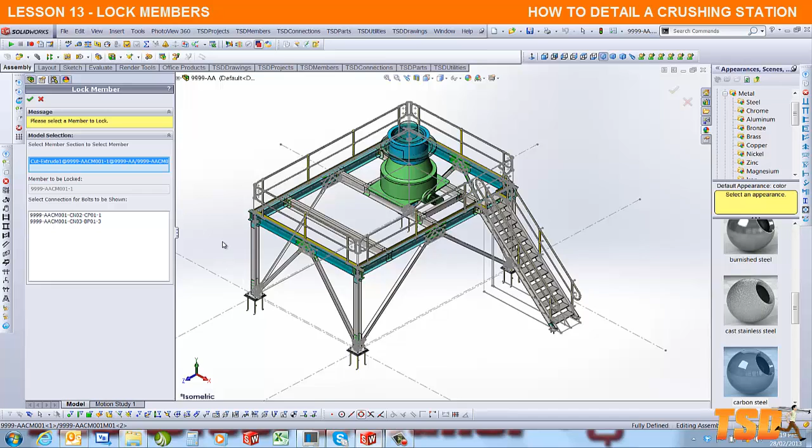So if we go to our TSD members and go lock member, select the column, and we need to select the connections that are going to come with this, with the bolts associated to it. For this instance, if we zoom in, the bolts that come with the column are the base plate bolts, so we're going to select those. There's a code there for BP, for base plate. If we select that, hit the tick, now it'll go through a lockdown process.

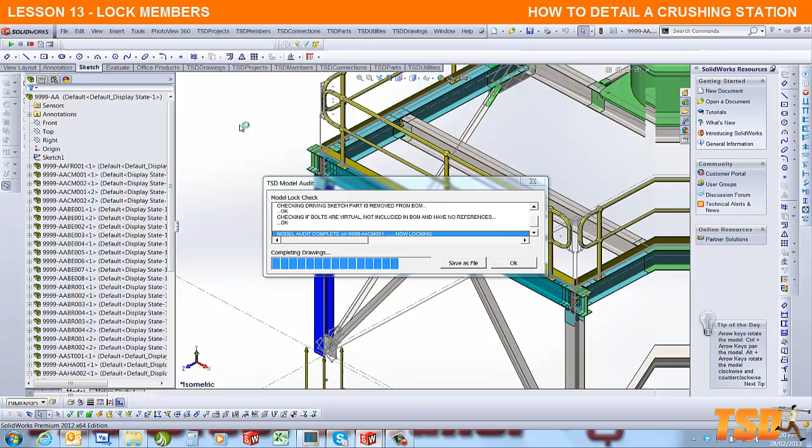What that's doing is swapping out sections, comparing plates with what's already in the library. It's filling in a bill of materials automatically based on the numbers of items in the model, and updating the drawings associated to that. Now you can see that column's done.

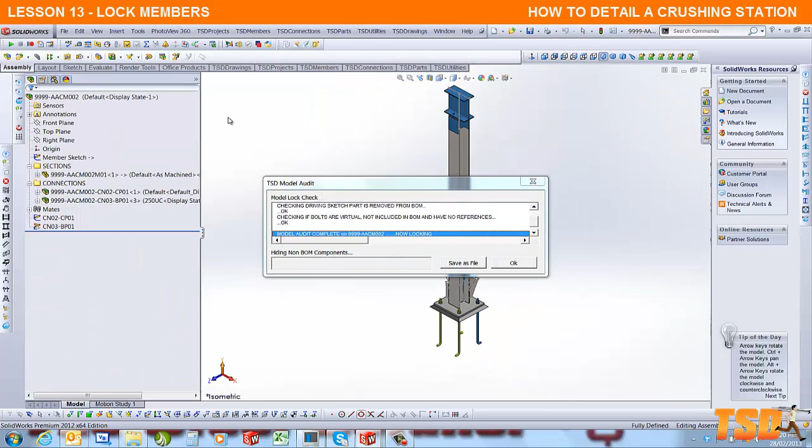Also, we're going to do the opposite column, so we just go around from one member to the next. Members, lock member, select the column, select the base plate, hit your tick. Now before you do that, make sure you do a Control Q and a Control Save.

So that'll be comparing plates, swapping out plates, swapping out the template, updating the bill of materials and the quantities associated to that, and finalising the drawings for us. So that column is now done. Control Q, Control S.

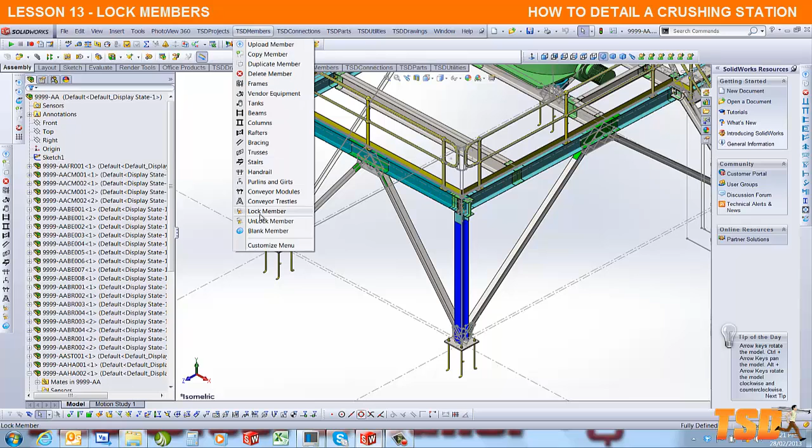Okay, let's select the beam up the top. So members, lock member, click the beam. Now this beam has two sets of bolts to which it's going to be sitting on top of the columns. They're the only bolts that come with that beam, and they are cap plates. If you look at these two descriptions here, CP2 and 2, and they highlight as you can see, and then we click the tick and that will lock that beam for us.

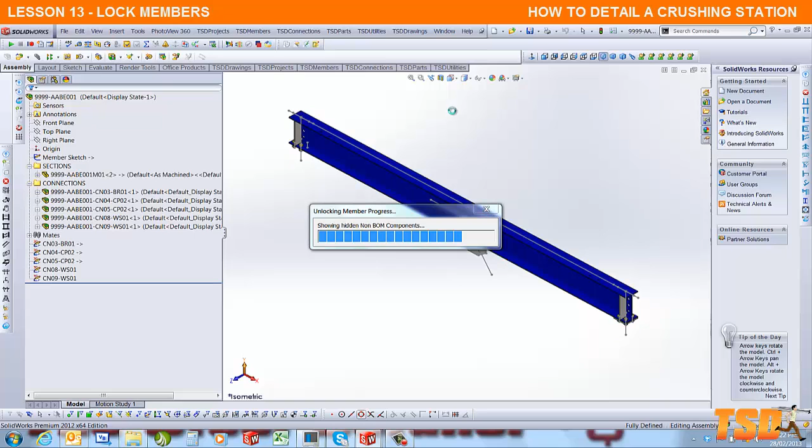Okay, now I'm just going to unlock that beam. Unlock the member, which you can do. Once you've locked, you can also unlock, which is a beautiful feature of TSD. And it's one thing that I did notice that had popped up in that member.

If I go into it, just going to remove all appearances at the top. This plate here should be excluded from the bill of materials, and it is now excluded from the bill of materials.

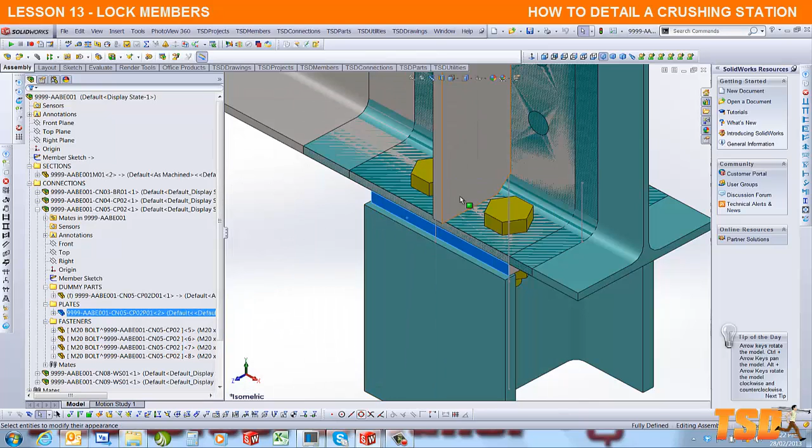And now we can lock that member again. So now we can lock the member, TSD members, lock the member, select the beam. Now the two cap plates that come with that will be locked, so we pick up the bolts and now we go through the lock process.

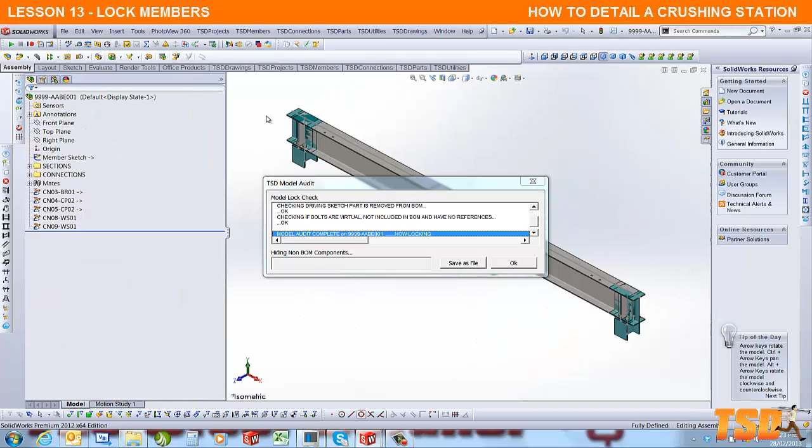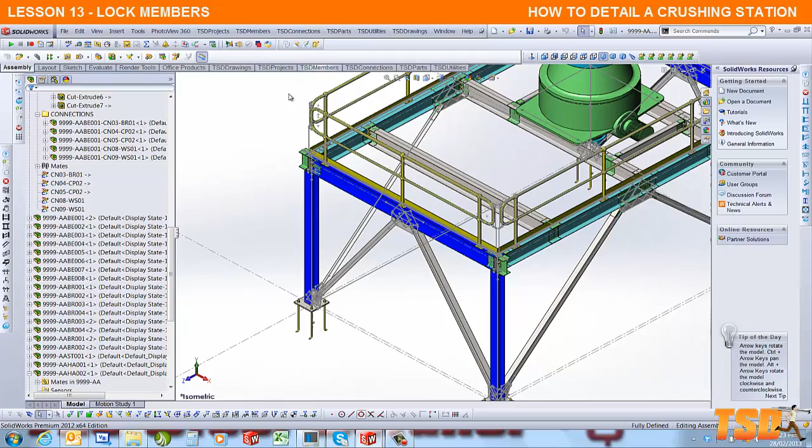So it'll update the drawings, update the plates. Okay, so now that beam's done. What you'll also notice, if I zoom out, is that the common columns for second instances and beams have all been done at the same time, which is really handy.

Okay, so now we need to go and do the rest of the beams. A Control Q, Control Save every time we do a lock. Lock member, select the beam at the back. Now this beam's going to have end plate bolts, and it's the only bolts that come with it.

So if we select that end plate and that end plate, because the others are fin plates, and that's a brace, because with braces, the bolts come with the brace, and with the fin plate beams, the bolts come with the fin plate beams because they're bolting into this member. So now we select the tick, and now that will lock that member for us.

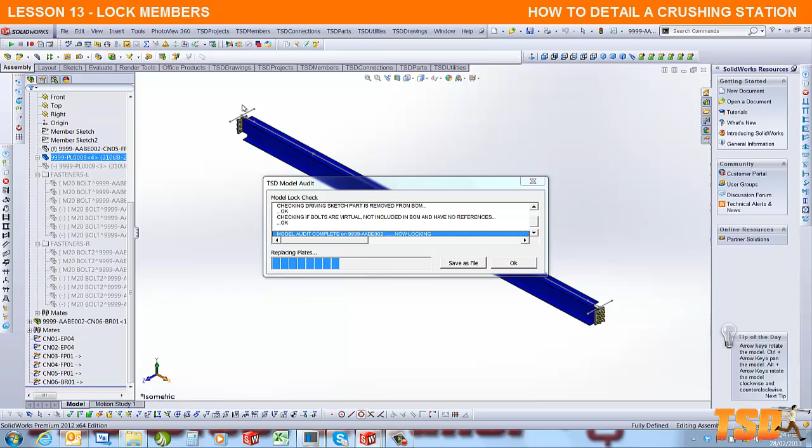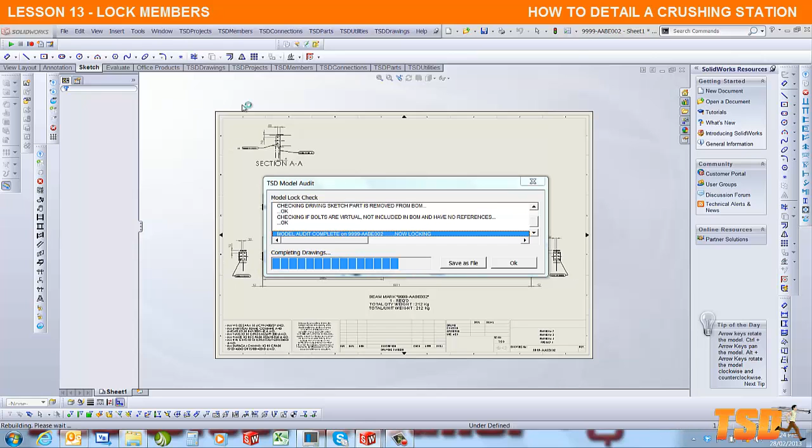So we'll update the bill of materials for the plates and the member section, swap out the bill. That's it.

And now we lock the next member. Now remember that when you do lock, Control Q, Control S, just before you do it. That way the changes that have occurred are actually captured properly.

Now we're selecting the opposite beam, which is going to be that end plate and that end plate, and we're collecting the bolts that come with that beam because it's bolting into the other two beams.

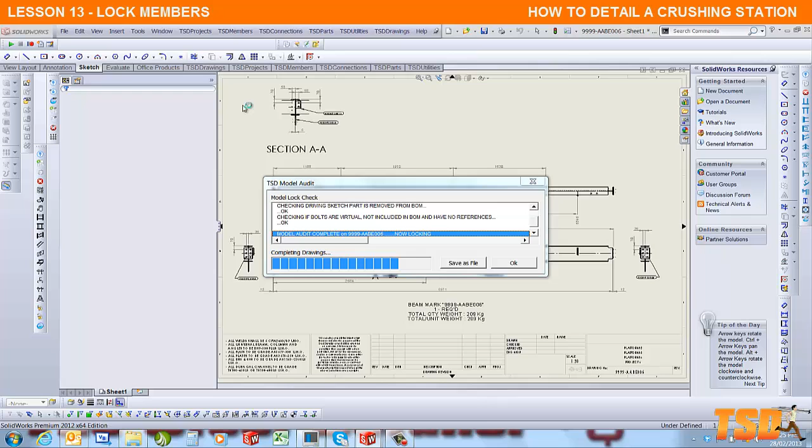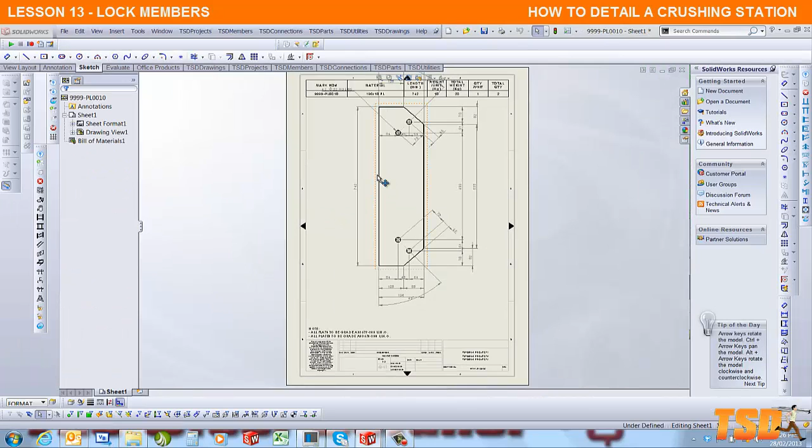So now we're updating the drawings. We'll have to go back to that other drawing and tidy that, and possibly even this one, because that's probably the same drawing. So if we open that up, you'll notice that we've got to do a bit of tidy up work in this drawing because it's changed in some way. Do some tidy up work to finish the drawing off.

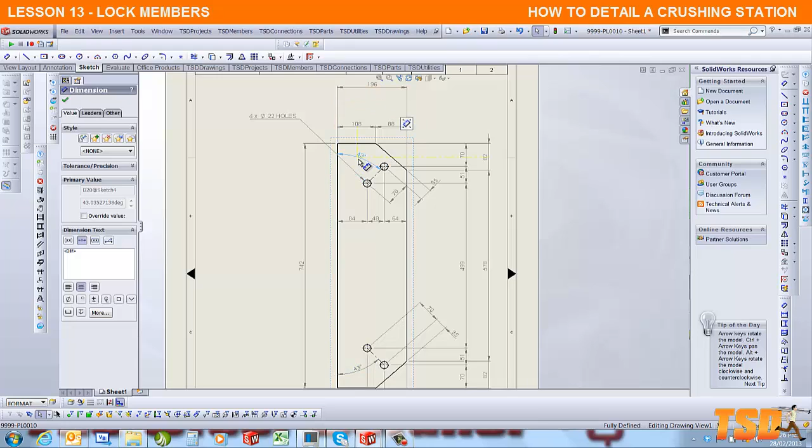Put that in there, bring those dimensions up to there. That pretty much tidies that drawing. You'll notice there's two, so it's also checked to see if there's two, meaning that plate there and that plate there have been replaced.

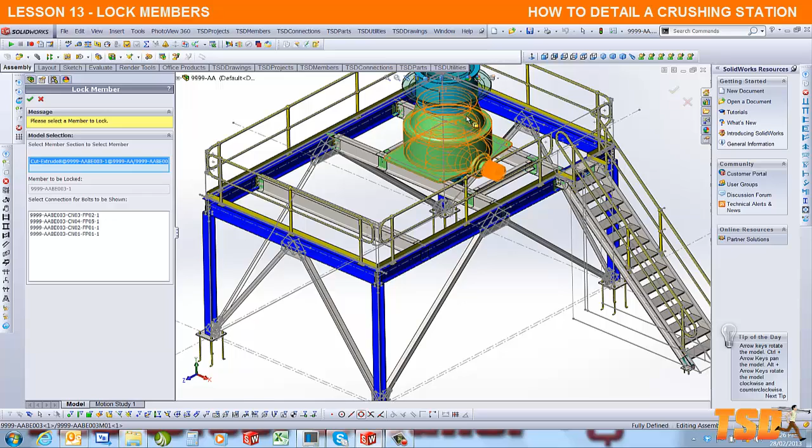Okay, so now we're going to lock the braces. Actually the beams, we'll do the beams first, going through one by one. So this beam has two fin plates at either end. We need to make sure we get the right fin plates. The very first two fin plates are generally the ones that come with the beam, but in this case that's not what's happened. We need to select these two, and as you can see, 1 and 2 are already in the order. So if we hit the tick, that'll lock that beam for us.

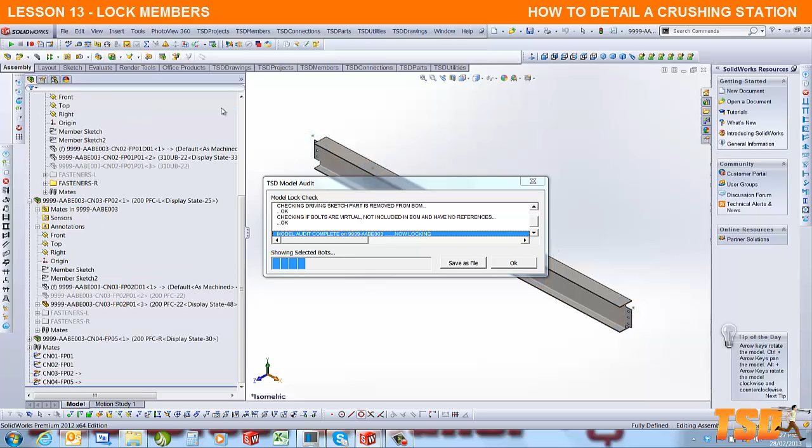So that beam's done. Then we go over to the next two beams. Control Q, Control S. Now we lock the other two. Obviously CN1, 2, that's those two.

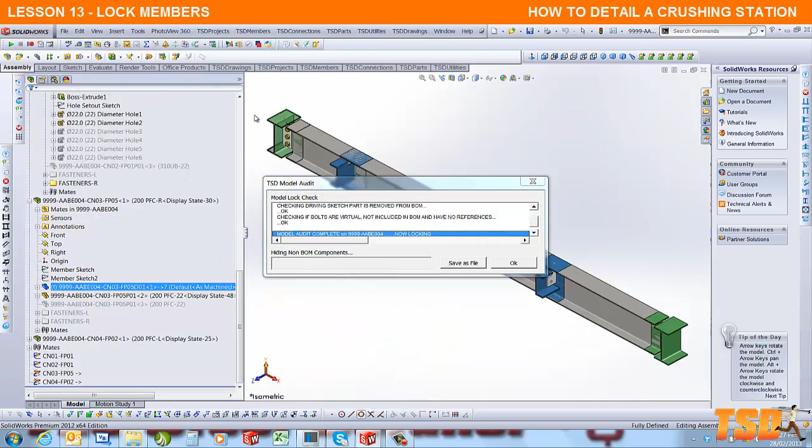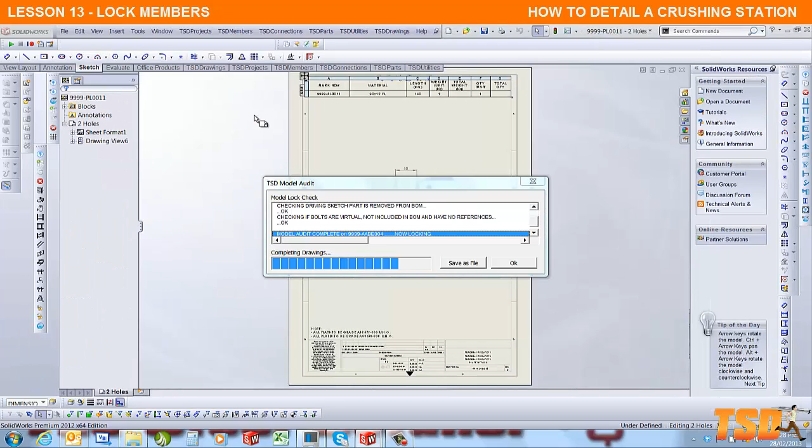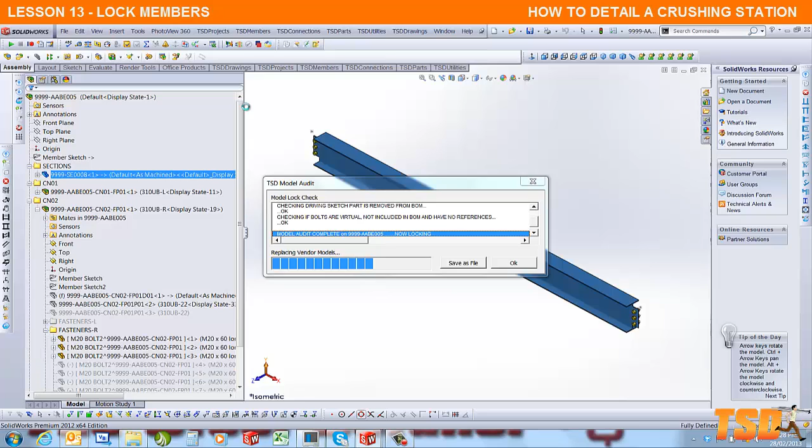Okay, that beam's done. Control Q, Control S. Then we do the next beam. Lock the next beam, and there's only two connections in that one. That beam's now done. Control Q, Control S.

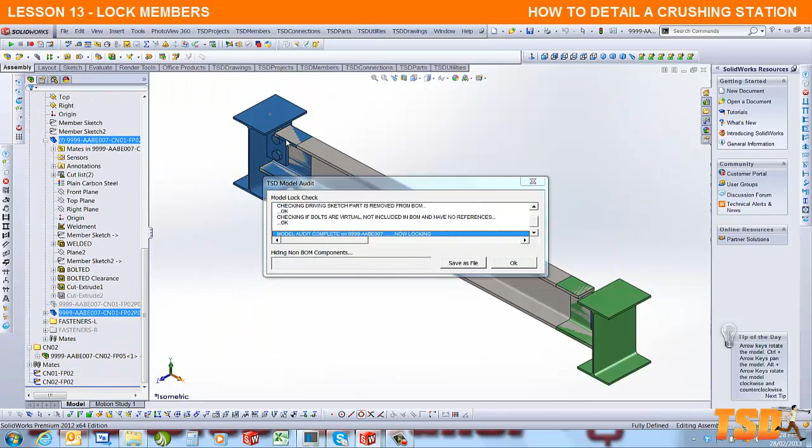Let's do the next member, which is this beam here. If you zoom around, that one, and the two connections associated to that need to be locked and selected, because that's where the bolts are coming with that member to be bolted in place. That one's done. Control Q, Control S.

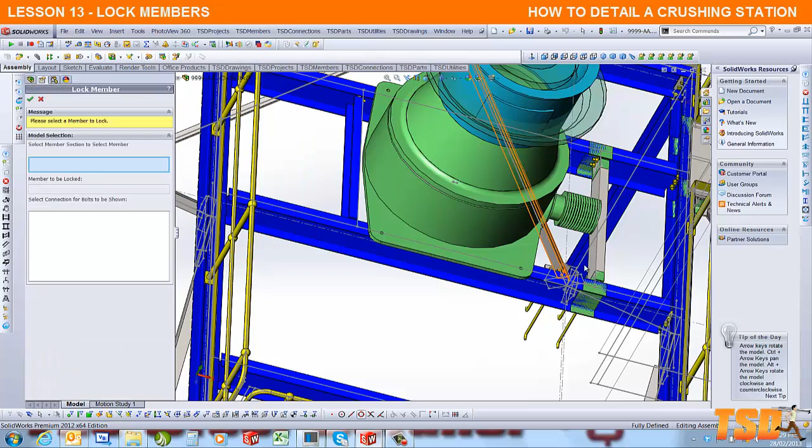The same thing again for the member on the opposite side, which is this one. Select the connections, click a tick. So that member's now done.

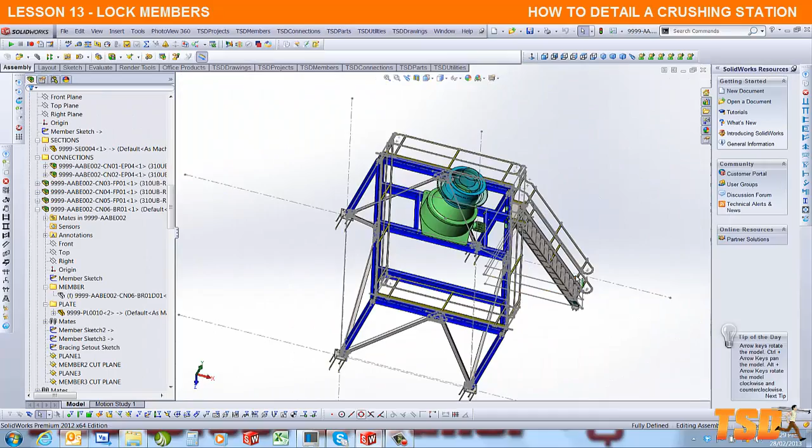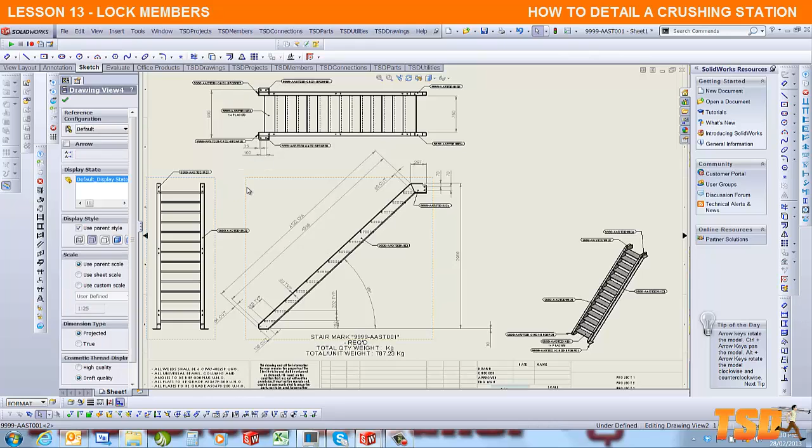Alright, let's check the stair drawing and make sure it's going to be okay before we lock it, because sometimes the table comes in and takes up a considerable amount of information and overlaps on top of your drawing view, so we need to make sure we've got enough room up here to move things around. I'm just going to squash this right over, because through examples of the past it can tend to clash up here in the top.

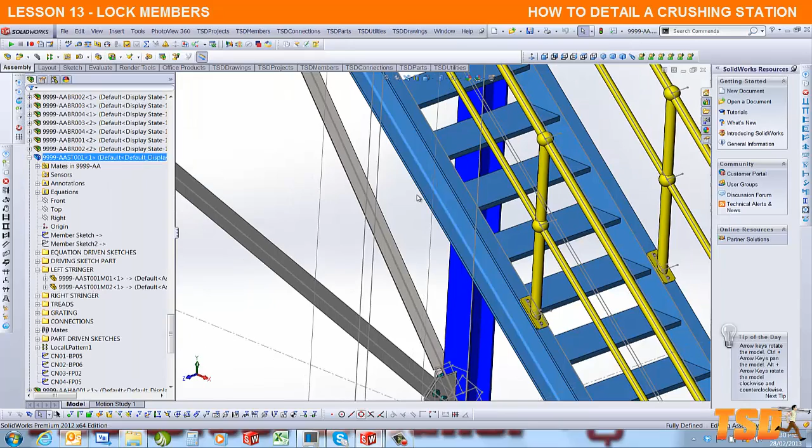I'm just going to bring that in really tight, that piece there, bring it out that way, swap that over. Doesn't clash. Okay, so we can save that. Now let's lock the stair. Control Q, Control S.

Members lock, select the stringer. Now all the bolts associated with the stairs are going to come with the stairs. That includes the 2 bolts at the feet and the 2 bolts up at the stringers on both sides. So we just lock that member.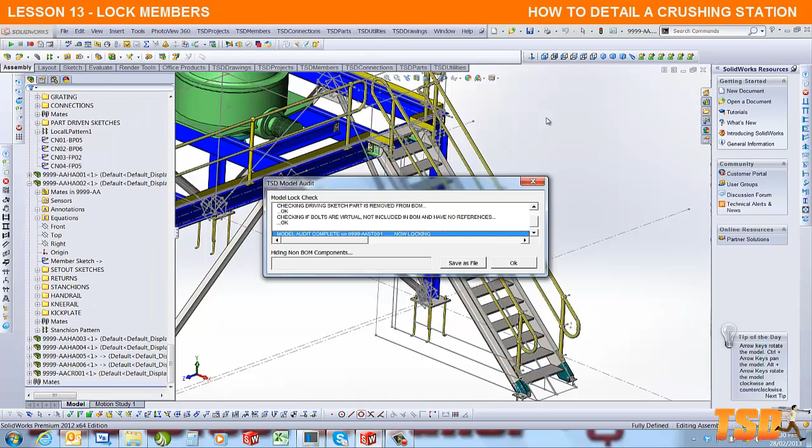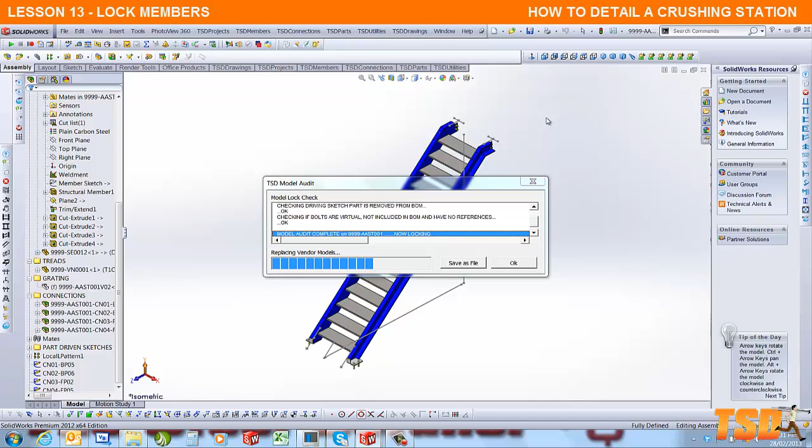Hiding the dummy components. It's now swapping out the sections, replacing the plates, checking to see if there are any duplicate plates, and putting in a bill of materials for us, and populating all the drawings - all the steel sections and the plate drawings.

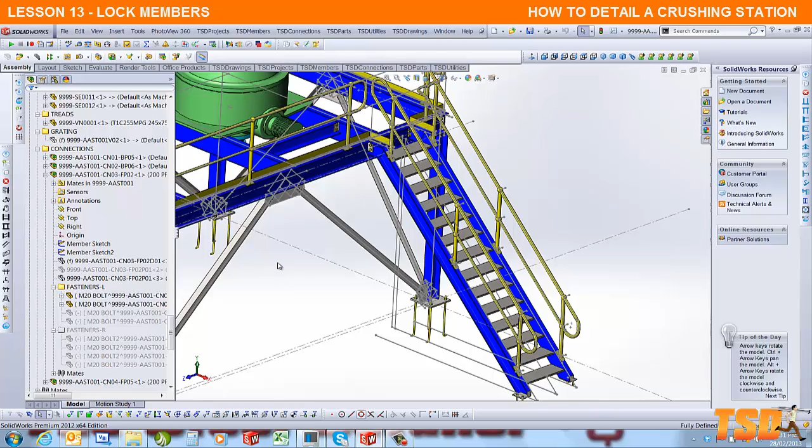Okay, so now we've done the stairs. Next thing we need to do is all the bracing. So member lock, remember Control Q, Control S, select this brace. If there are any bolts included in this brace, it will automatically count them. Hit my tick, and it automatically brings in the bolts.

So that brace is done, and there are 2 braces included in that process. Control Q, Control S, lock this member. Because there are no connections, as I said before, the bolts are automatically collected because they're not part of a connection anyway.

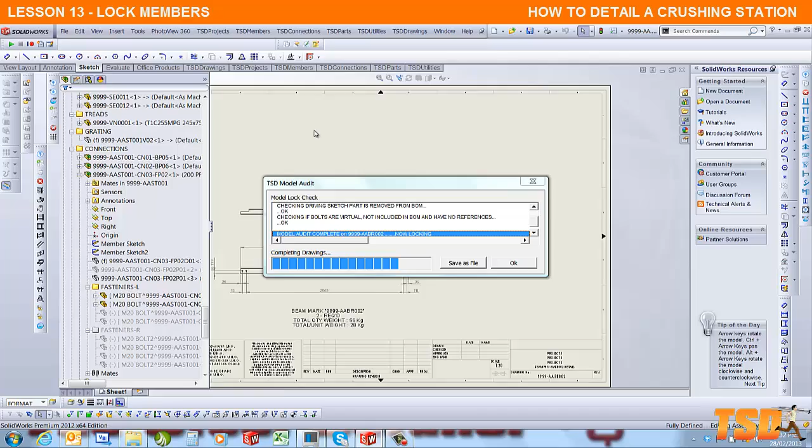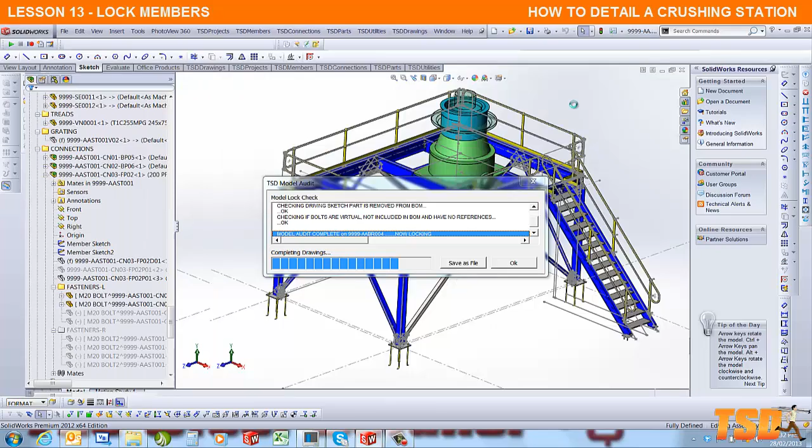So let's fix that brace. Now we're going to lock another member. This is the 3rd brace, and we've got 17 sections already locked. It's counting the number of sections automatically. Control Q, Control S again, members, then lock again. Hit the tick.

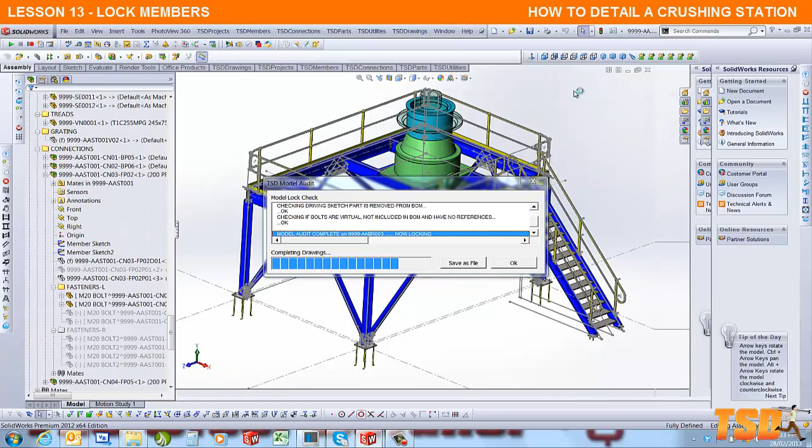So now essentially we have all the main sections done, fully locked. If we look up into our drawings area, you can see which ones are locked and which ones aren't on the right hand side. Obviously the handrail needs to be sorted, so that's the next step.

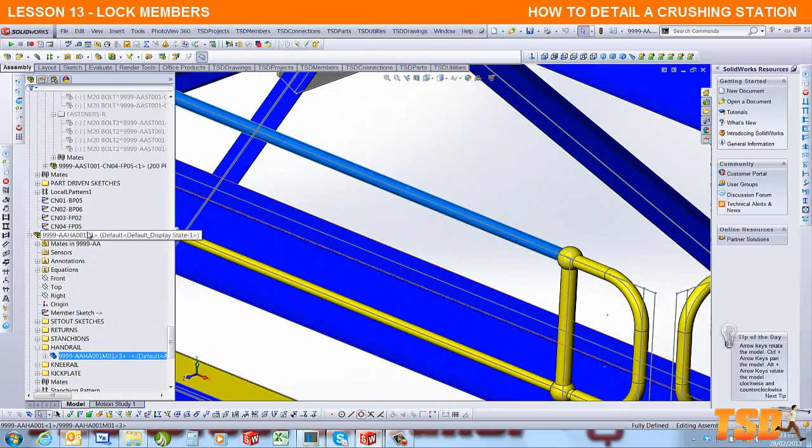Between all this handrailing that we've put in, the only ones we haven't checked are the top ones, so we need to go through the drawings and make sure they are finalised. If you select the top rail, select the member in the feature tree and then open the drawing, you can see that we've had a change in size, so we need to make an adjustment. I'm just going to reduce, 1 to 50, reduce that down so it's smaller and has lesser impact on the drawing, and do some tidy up work.

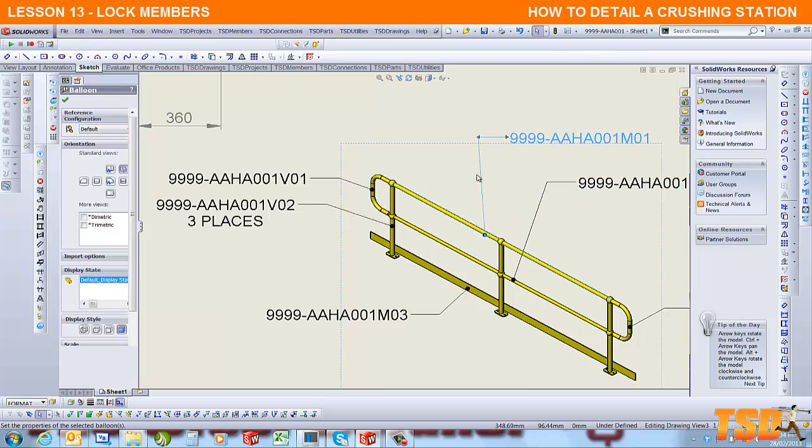Okay, and we've lost that dimension. Go back up and put another one in. Now before we do that, we must add a centre line in on that member. Now put the dimension in, sets out the stanchion from there to there.

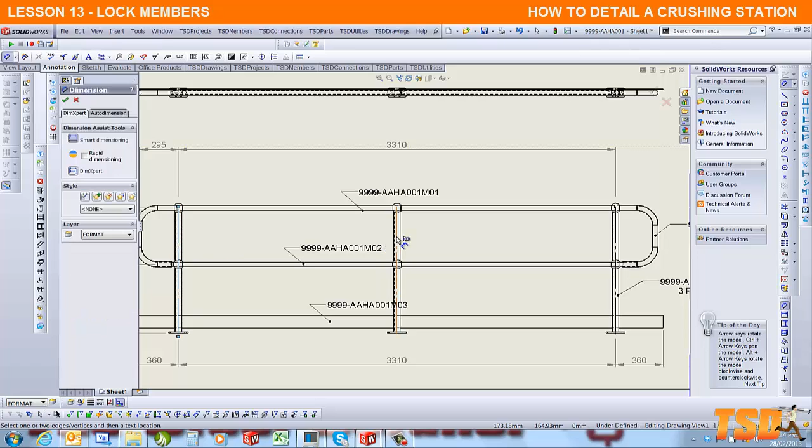And we're just going to put in a couple of swaps here for the locations of the top and for the marking. Okay, so that updates that drawing. We'll just move that node over so that's in the middle now.

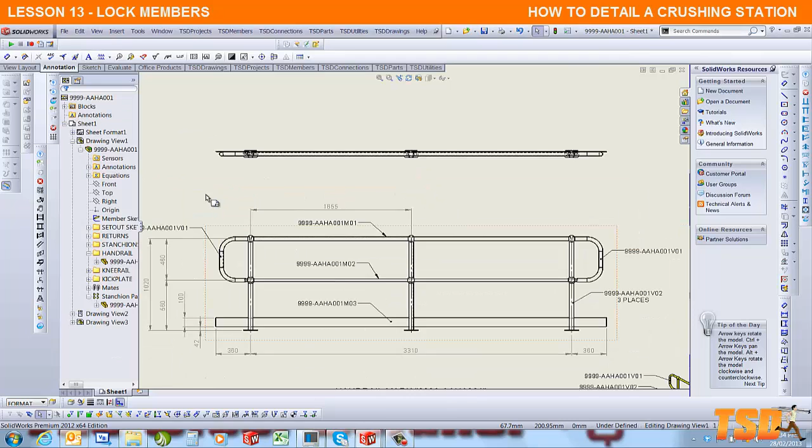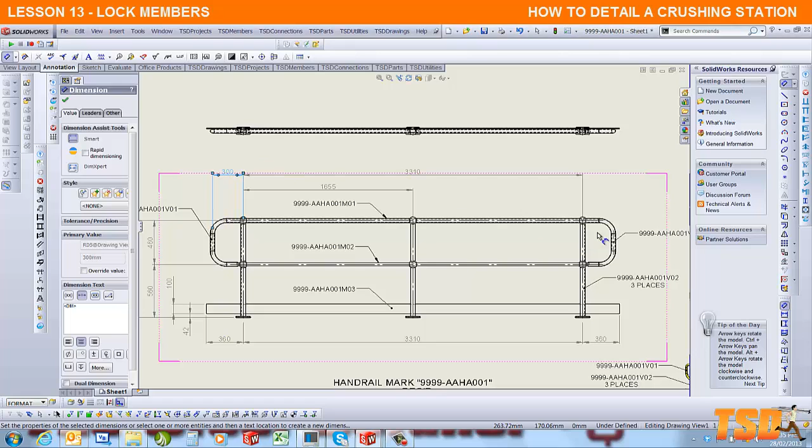These pieces look like they've lost their links, so I'm going to fix those up. If I select that, put a center line in, select that, put a center line in, and tidy this up because there's a center line running through the middle. Put another dimension in from there to there, and another from there to there. We can set that up there, and from there to there. So you can see that's 300 as well. Now that fixes that handrail.

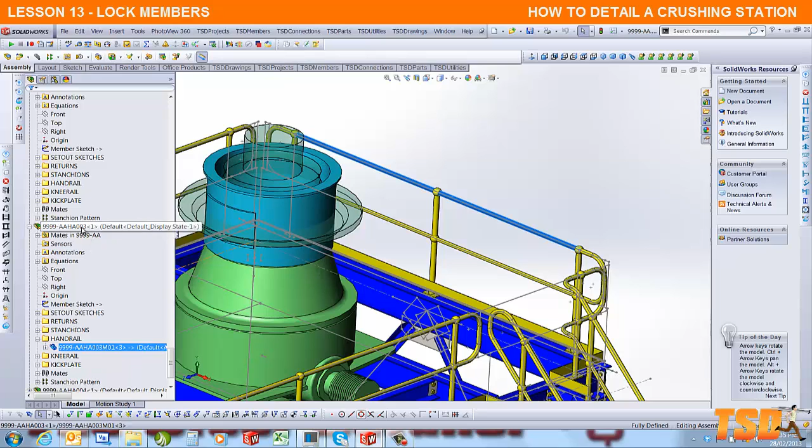Now these handrails can be identical to one another. You could remove this handrail and put the second one in, but we're going to treat them as separate because it might be a different connection someday at that point. So we'll treat them as separate individual ones. Now I'm going to draw it up and do the same process again.

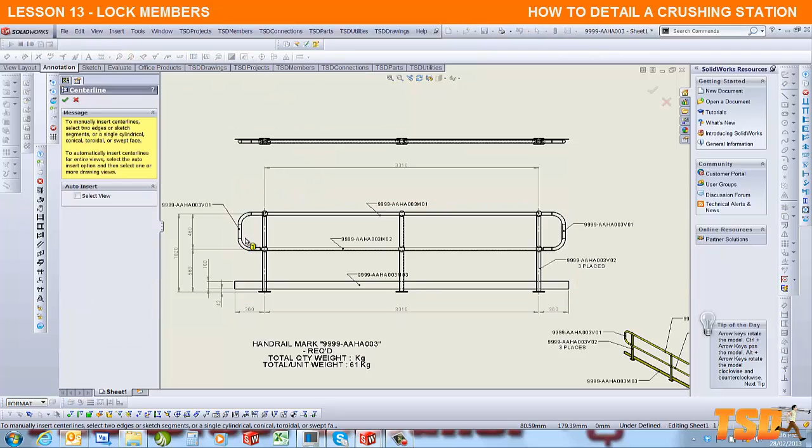Use custom 50 on the scale, fix that up there. Now we go over to this one, just remove that dimension and do a rebuild. This one doesn't look like it's lost its links. There is a 295 there, which is incorrect. If I select that, and select that, and select that, move that out the road, move that out the road, and that out the road. Tidy that up.

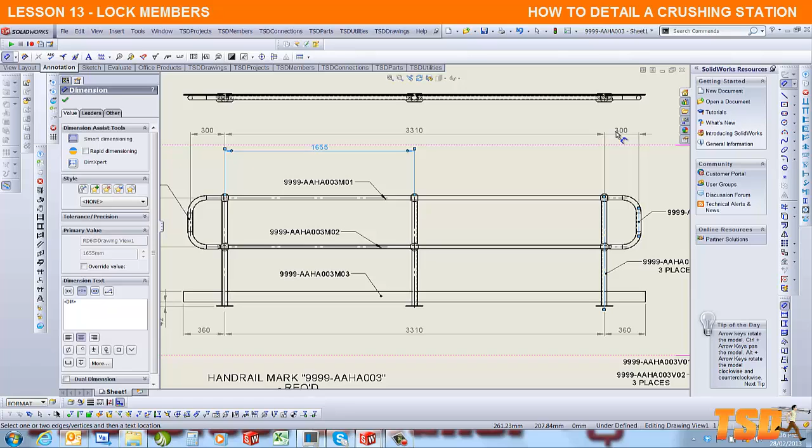Tidy the kick plate. Add some extra dimensions, from there to there, 300, from there to there, and from there to there. Now we've done that, move that node over, and that's that handrail done.

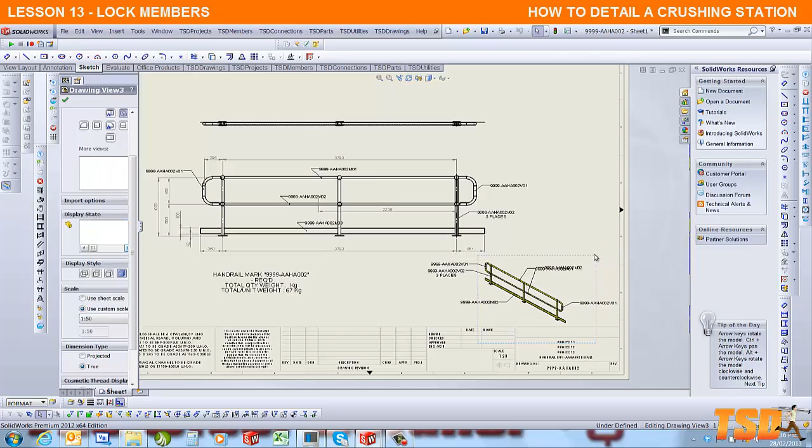Let's check out this one. So the next one is to open that up, same thing again, 1 to 50. Process again by the looks of it, from there to there, from there to there, and move that note.

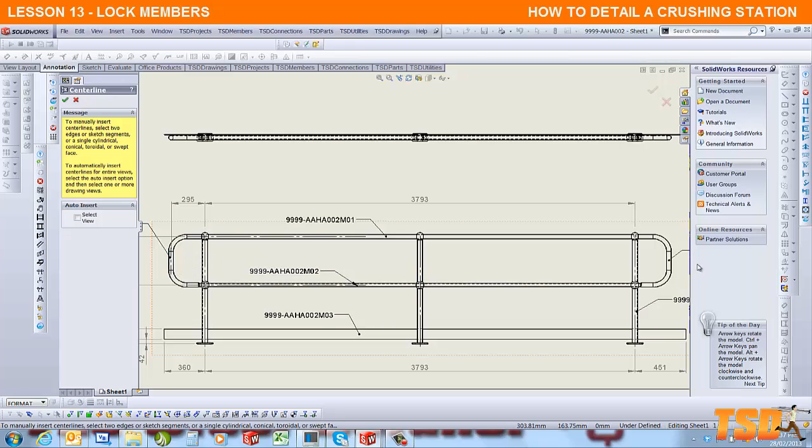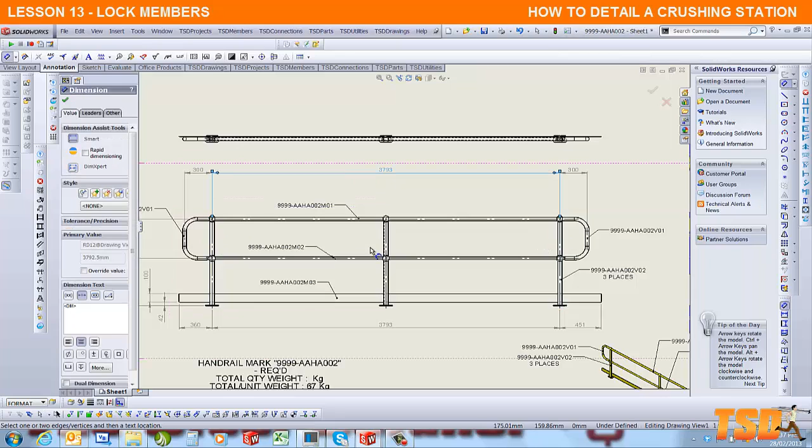We put in an annotation, sketch center line, select that member, that member, that member, that member, and that member, and that 295 is incorrect. Dimension in, from there to there, and from there to there, and it looks like that's now lost its link, so we'll put that back in again, from there to there to there, and then we'll put this one in, from there to there, and now we can move that over to there.

So that one's done, and then we go over to the next one, select the kick plate and the main member, and then open up the drawing. Now this one's a bit bigger, there's a bit more work involved in it. So we need to customize that, 1 to 50. I'll bring the handrail down a little bit.

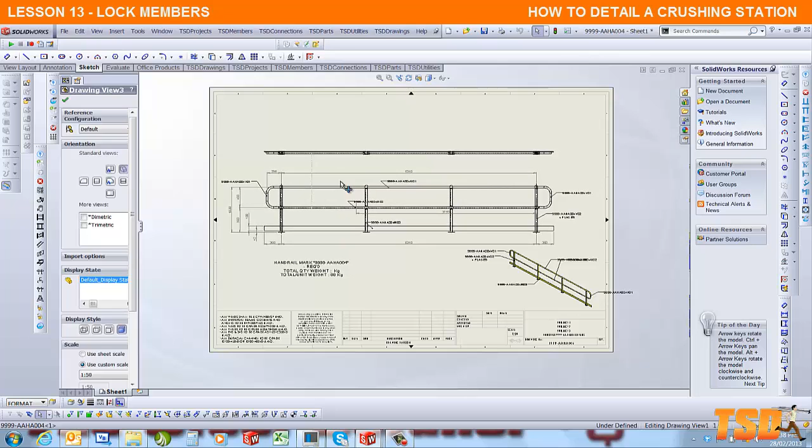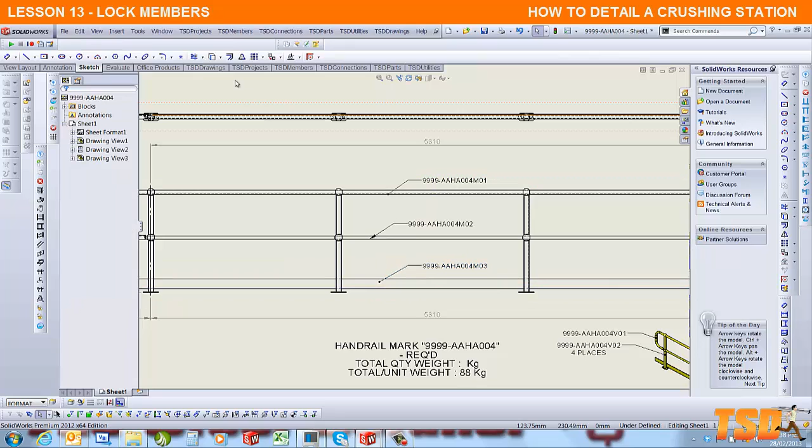Probably need to position it by grabbing the view over the top, grab the note, and now we've got to remove some of these dimensions that we've got in place. And bring these notes over so that they're in the middle. Select the annotation, we use center lines on, just making sure you get right in the middle of the tubing. And obviously at the end as well.

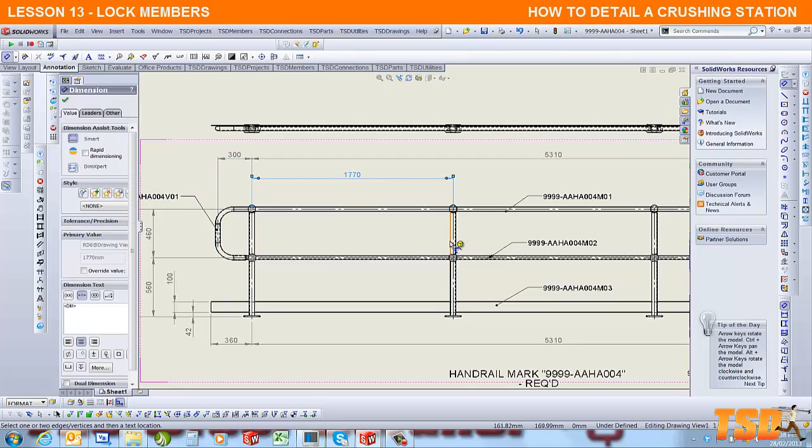And we put some dimensions in, from there to there, from there to there, and from there to there. Should pretty much do that handrail. Obviously the note is hanging out off the side there, so I'll bring that in a little bit. And there's an overlay there.

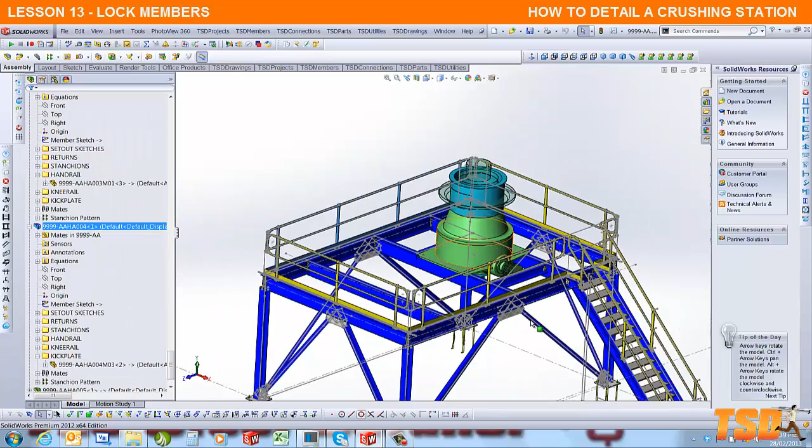Okay, so that tidies that drawing up. Now we just finalize the whole lot of the drawings in one go here, because we've already checked the handrail around here. So we're now just going to go through a process of lockdown again on the handrails. We select the handrail lockdown. There's no bolts. The bolts actually come included with the stanchions in Australia, so that when you order a stanchion, 2 bolts are allocated to the stanchion. So we don't model them or put them in.

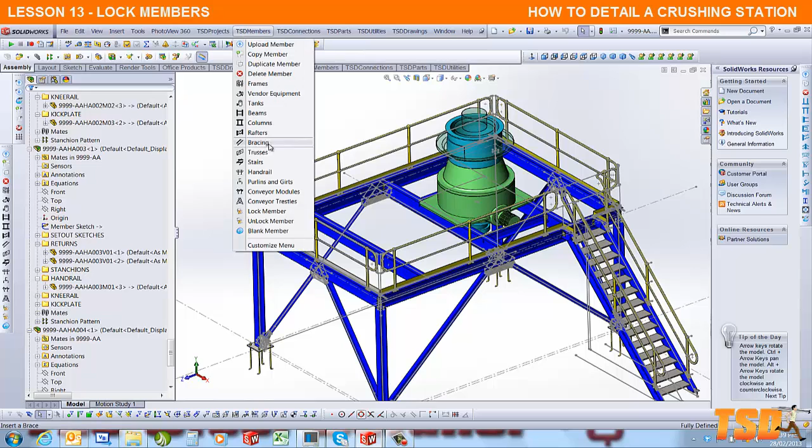So that one's done. Go to the next one. Control Q, Control S for save. Lock the next one. So we might as well just go around the outside and work our way down. That one's done. Q, Control save. Members. And then lock member on this one. That one's done. Control Q, Control S. Lock member again.

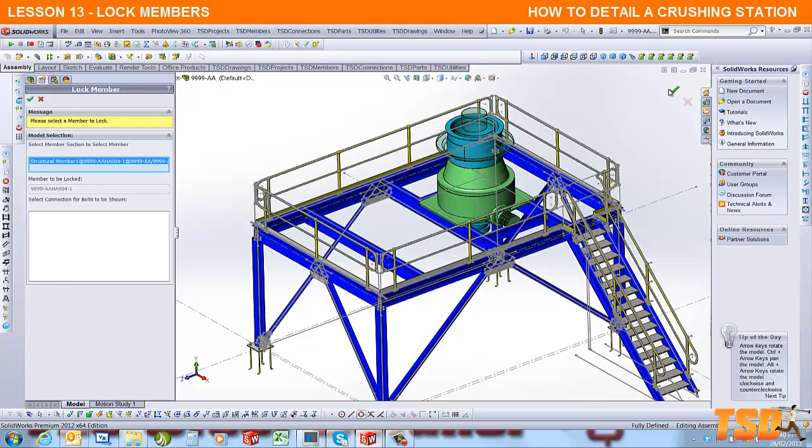You'll notice that I'm selecting any rail or any kickplate that's associated to the handrail. It automatically grabs the subassembly parent and knows which one to start the whole process on. That's that handrail. And the same thing for this handrail. So lock that member. And we want these two. Select that rail.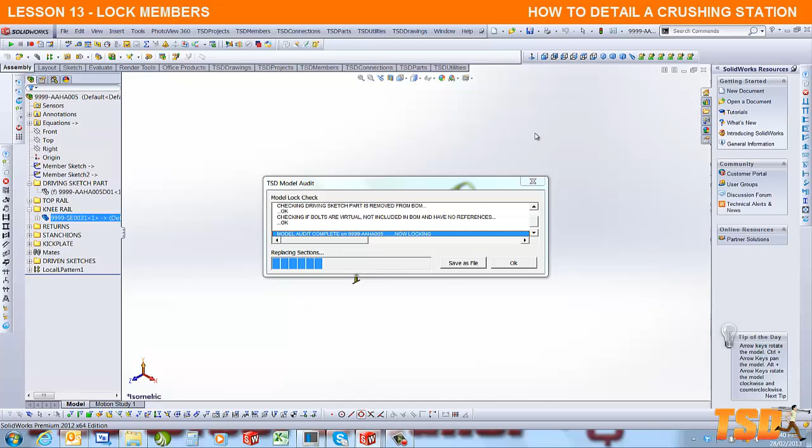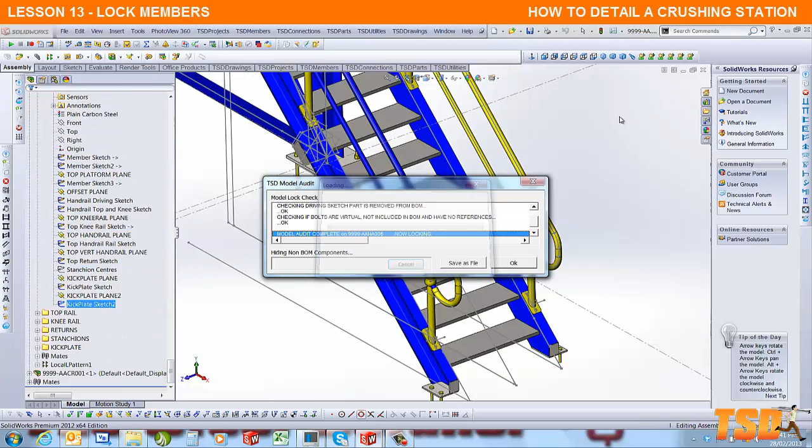So let's put in a bill of materials. And you'll notice that some of the handrail there probably will need some work in the drawings. Go back to the Control Q, Control S again. TSD Members, lock member, and we'll do the last handrail. And that locks everything that is structural inside the model that we've just completed.

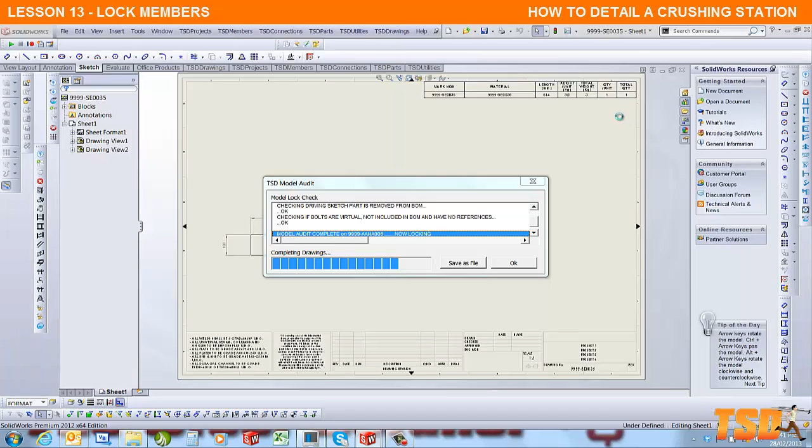Okay, so there's a fully locked structural model. Good thing about locking is that if an engineer, or an architect, or a designer needs to make a change, you can unlock, just as simple as lock. That concludes locking.